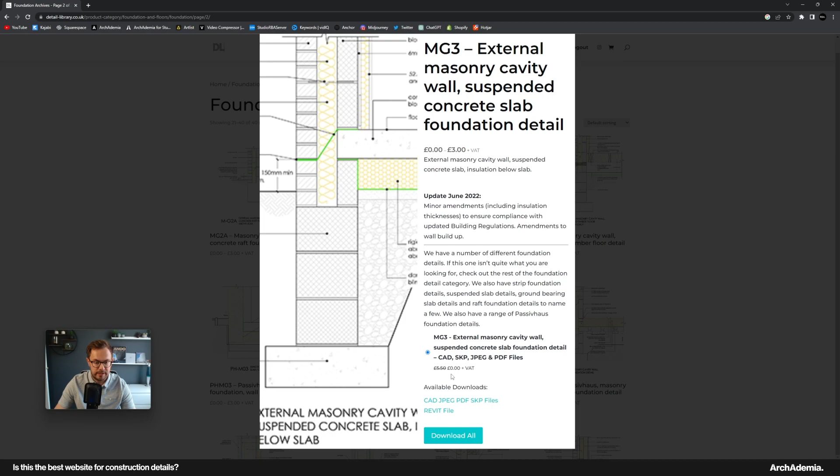To demonstrate how effective this website is, if we click on that - forget the quick view, just click the actual title - because we're a paid member, the one-off fee is struck out and set to 0, so we've got access to every detail on the website. We hit download all, then go to my downloads and extract it here.

It's good to have the PDF handy, that gives you a little snapshot. Same for the JPEG, that's just preference. The reason for the two lots of extracts was just that the Revit one appeared first and there was another folder you needed to extract - that isn't always the case.

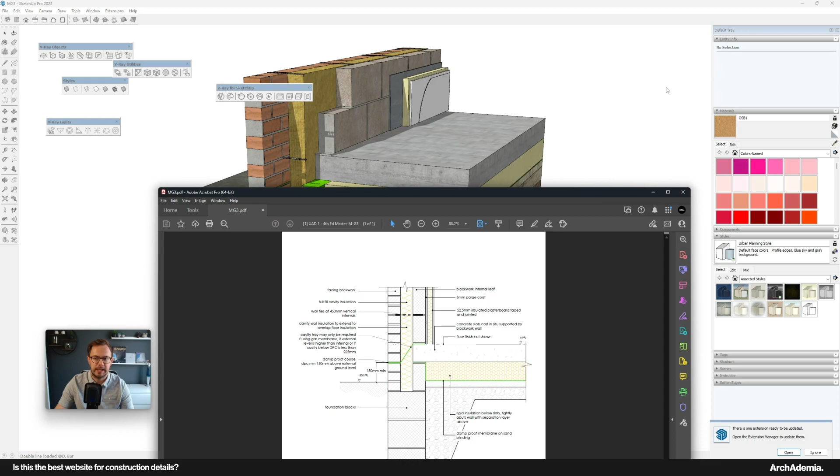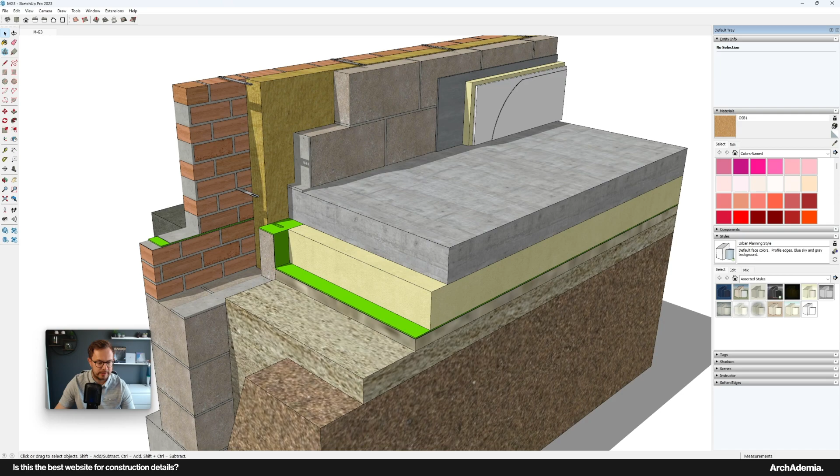But then look at that - there's no better way to demonstrate to a client or contractor your thinking when it comes to construction detailing than showing it in 3D. Let me just turn off all that. That is absolutely fantastic.

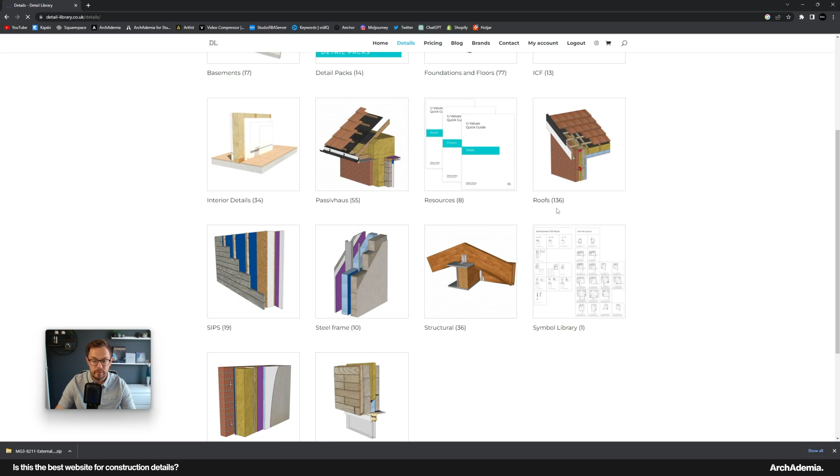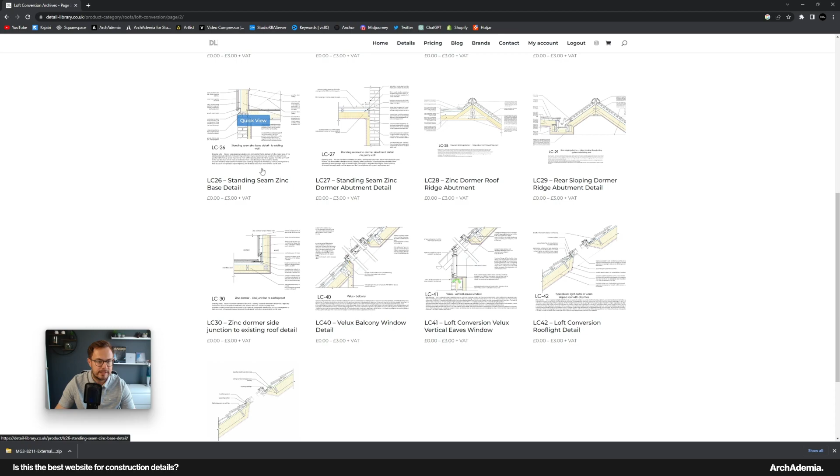If we then check out the CAD equivalent, while that's loading, let's have a look at something else - let's say roof, for example. What I was deliberately looking for here was, I've recently done a loft conversion for a family friend, and I actually utilised this website to inform things, since this was a replacement roof - there's details there to do with replacement of a roof, details to do with where a dormer meets the roof but is inbound from the wall, and details like standard roof lights. This saves you so much time, and sometimes these details have additional building regulations notes underneath as well.

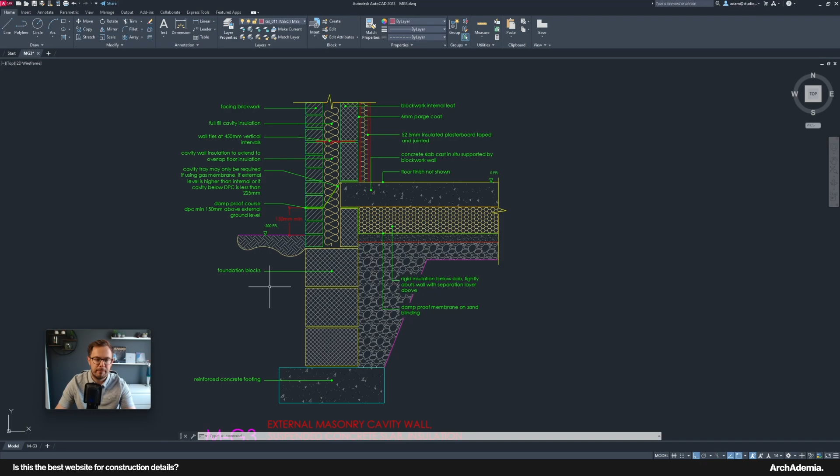Now that's loaded, you can see all the annotations are applied. As I mentioned earlier, it's completely up to you if you want to turn that into a key - you could move that off to the side and replace those with numbers. What I'd recommend is that you edit the formatting, make it your own. You might want to play with line weights. When I've imported these into my drawings, I replace the font with our company font, and mess with the hatching and line weights a little, always trying to make it your own, and always double check.

The reason for double checking is that there's a liability crossover here, and it's still your responsibility as the project architect to make sure what you're proposing is correct and applicable to your project. So I think that's it really.